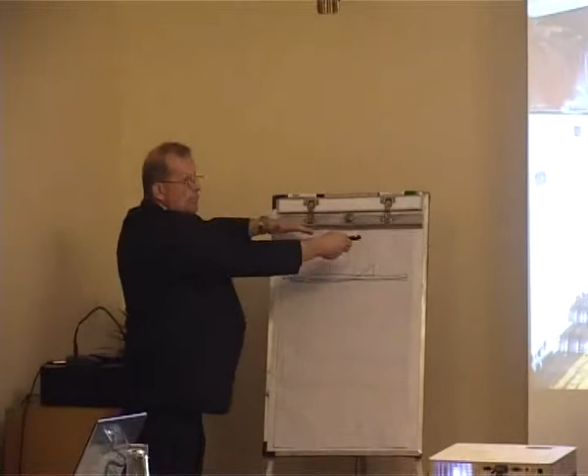See, here you can see the bars, and here you have the triangles moving the biomass into the furnace. Then here every second set of grate bars is fixed, and every second set is moved by the hydraulic systems. But I think we should move back one time here.

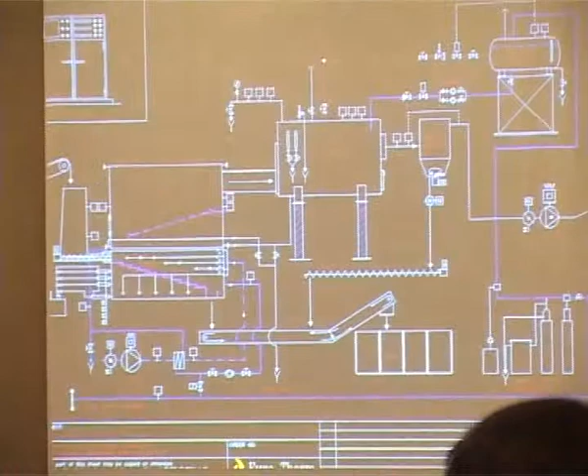You can see there are three sets of hydraulic systems. That means you don't necessarily have to move the grate bars at the same time, depending on the fuel. If you need the fuel to turn faster in the beginning and slower at the end, then you can adjust it by the hydraulic system.

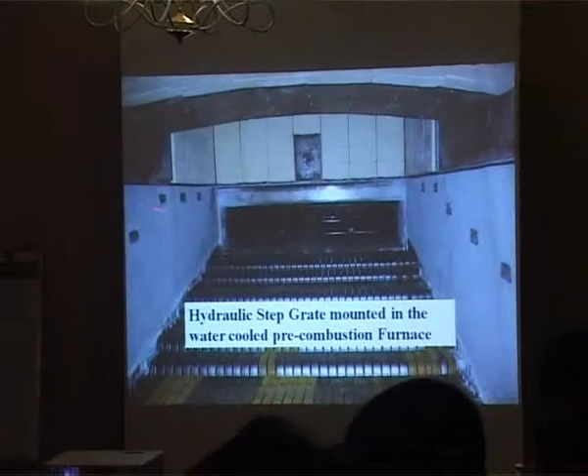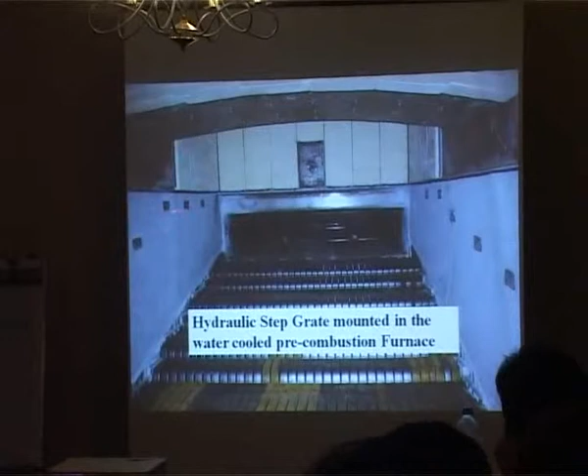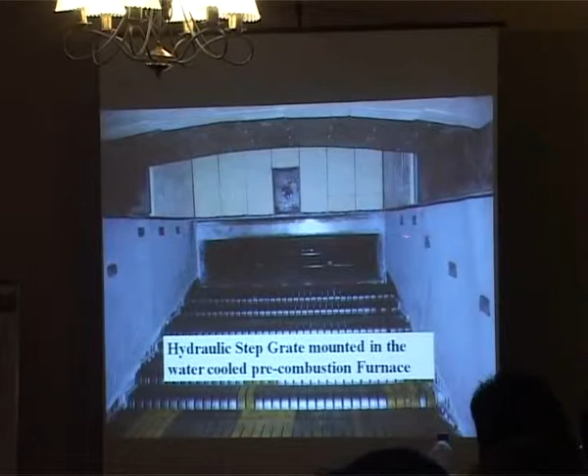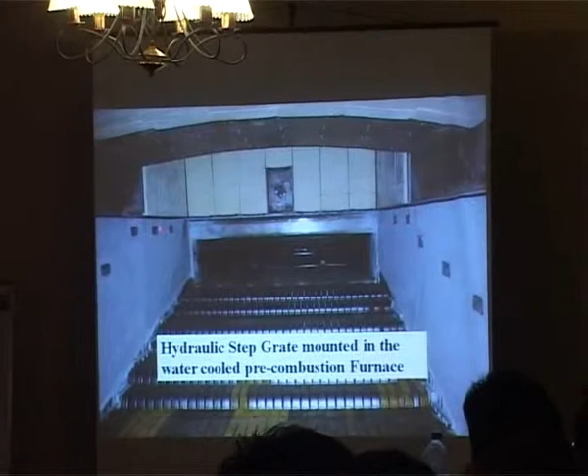Then what I think is very important is the supply of air. Here we have supply of secondary air into the boiler. If you look, you can see here 3 holes, here 2 holes. You should not let the secondary air supply be at the same distance, because then you'll make problems. Here you can see it's a little bit closer, here it's further away, then this one is blowing in the middle between these two. Doing this, you get a much better mix between air and combustible gases.

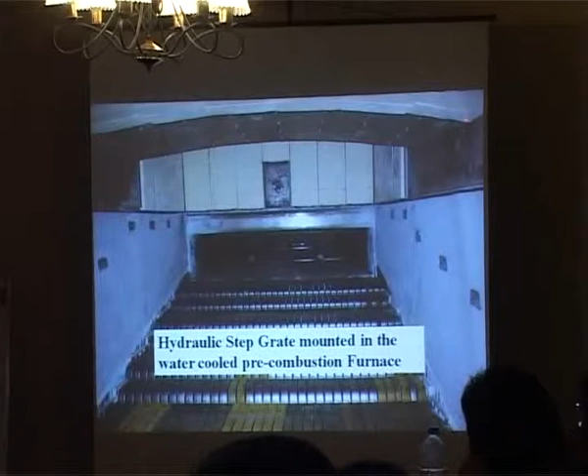Here, refractory at the top, and then the flue gas burning in here has to pass this way into the pre-combustion furnace, where you can add additional air at the top in case you haven't got full combustion. How to know if you've got full combustion? You can know this by carbon monoxide. If you have too high a content of carbon monoxide, then something is wrong with your air mixture. You need to put in some more air or more oxygen for the combustion. How much the impact is, I have made a calculation we can take a look at later on.